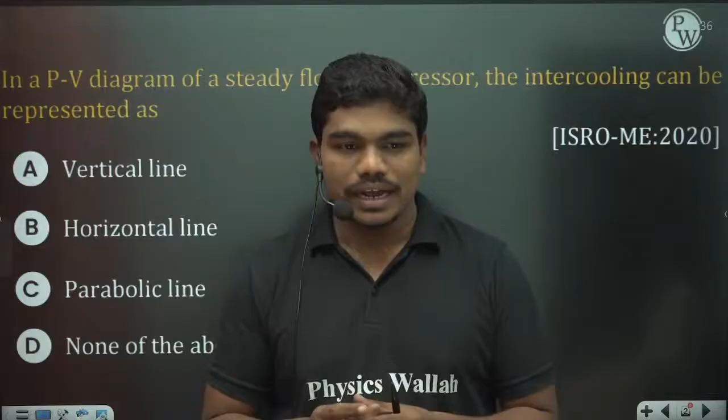Okay, JE 2025, please guide me, is there any scope in engineering? Yes, definitely in engineering you always have a lot of scope actually.

Okay, so let us start with this question. In a PV diagram of a steady flow compressor, the intercooling can be represented as what? So why do we do intercooling first? What is the necessity to do intercooling in any compressor? You know that normally if compressors run on some gas, PV equals RT, the normal ideal gas equation. So when we compress, the air temperature will increase, everyone knows this.

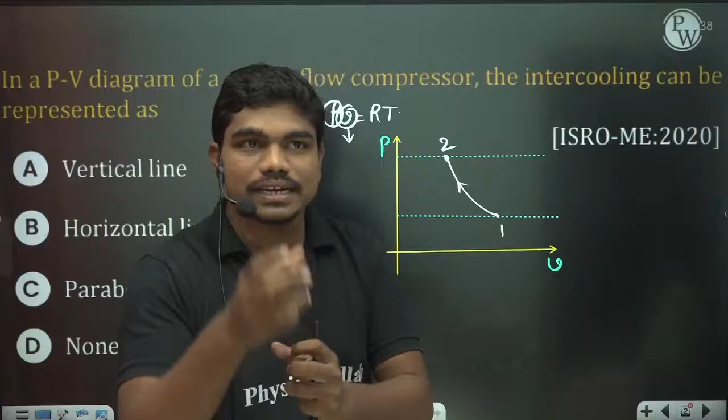So at that time what happens, if you do compression in a single stage - let's suppose this is compression 1 to 2, maybe some adiabatic compression on a PV diagram. When we compress, specific volume decreases and definitely pressure increases, right. So when V decreases and pressure increases, normally the ideal case of this compression is isothermal. But practically isothermal compression is very difficult because if you fit a cycle tube cylinder and start pumping air, immediately the cylinder gets hot, correct? So that's why practically increasing temperature will create complexity in compressing the air.

So that's why we generally take an intermediate pressure - so the system compresses in stages up to here, to 2', but here we control some temperature and then compress again like this. So this is 3' maybe. So this stage where you actually cool the gas - during this portion what you do is you actually take the heat from the system, from the gas actually. So this process in between, let's suppose this is A and this is B, this process A to B is called intercooling. So intercooling is always represented by this horizontal line on a PV diagram.

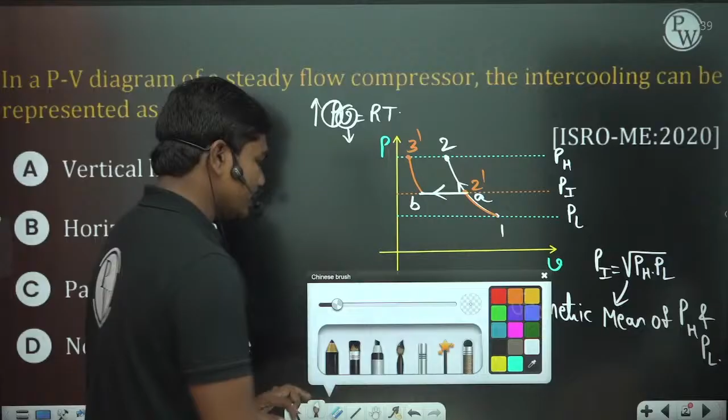Okay, so we have a lengthy derivation for this. But let us right now just keep this in mind, because this was a very short session on PYQ solving. So this line shows the intercooling curve. So A to B is intercooling, and because of this we will save this amount of load, or work, on the compressor.

Okay, so this is saving in work of compressor. Saving of work in compressor, and this intercooling A to B is a horizontal line in this PV plot. Okay, so if you have studied the Brayton cycle compression intercooling techniques, this question will be very easy to solve. So this AB is going to be intercooling.

In my life I have seen a compressor of 14 stages. When I worked at HPCL, there was a compressor with 14 stages of compression, 10 low pressure stages and 4 high pressure stages. And in 14 stage compression, for many gases we do intercooling in between. Okay, let us go to the next question quickly.

Which of the following uses a regenerator? So among these cycles, Brayton, Ericsson and Stirling, in how many cycles will we use a regenerator? So first, what is a regenerator? This regenerator is nothing but a device which absorbs heat during some part of the cycle, and rejects heat during other part.

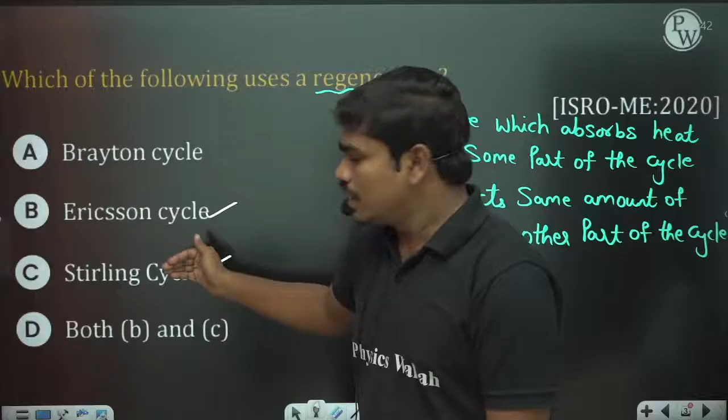So in both the Ericsson and Stirling cycles, heat addition and heat rejection are operated by the regenerator. So both B and C are correct, which is option D. Ericsson cycle and Stirling cycle both use a regenerator for the heat addition and heat rejection process. Okay, then let's go to the next question.

There was a bit of controversy in this question, now we will see what it is. A refrigerator with COP of 5 is used in a room of 300 Kelvin. So suppose a room had a temperature of 300 Kelvin. Now we have a refrigerator. What is the temperature inside? That is not given, but the coefficient of performance is equal to 5. So now we will solve.

See, COP is equal to Q dot L, the refrigeration effect you want, divided by the work input you are supplying. Now, the room temperature is 300 Kelvin, and we don't know the temperature inside the refrigerator. But COP is given. Now let us read the question.

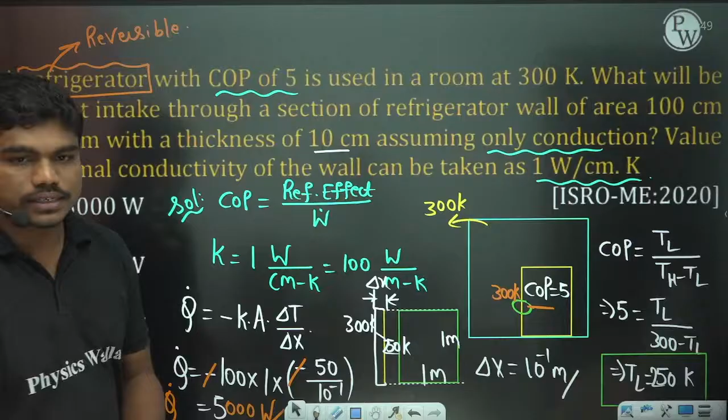Then Q dot value is equal to 250000 watts, actually 250 kilowatts तक value आएगा. Correct? Yes or no? 5000 is coming. Delta T is 250, right? What is this value? 5 times of 300, okay, this is 250, sorry. So if TL is 250, then temperature difference is 50. Then this value, so 5000 watts actually. So 5000 watts is the correct answer. Yes, TL 250 होना चाहिए, क्योंकि अगर इस equation को आपने solve किया तो TL का value 250 आएगा.

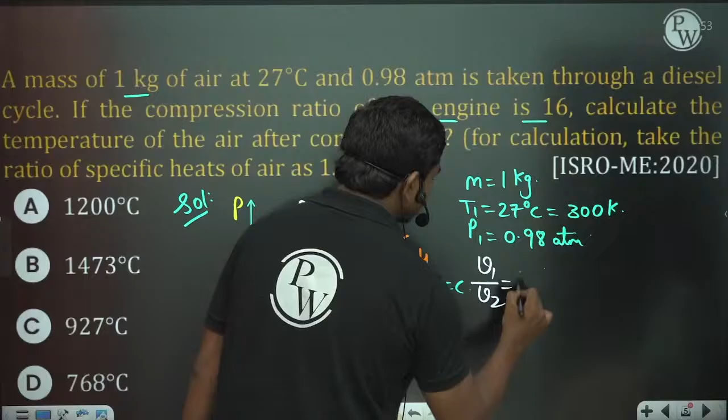If the compression ratio of the engine is 16, so what is the value of compression ratio? If this value is V1 and if this value is V2, then they have given that V1 by V2 is equal to 16, correct? So this is the compression ratio. Calculate the temperature of the air after the compression. That means when compression ends, we come to the second state, so what is the value of T2? So what is the temperature of this cycle at this state 2? This is what they are asking. So this 1 to 2 is adiabatic process, yes or no?

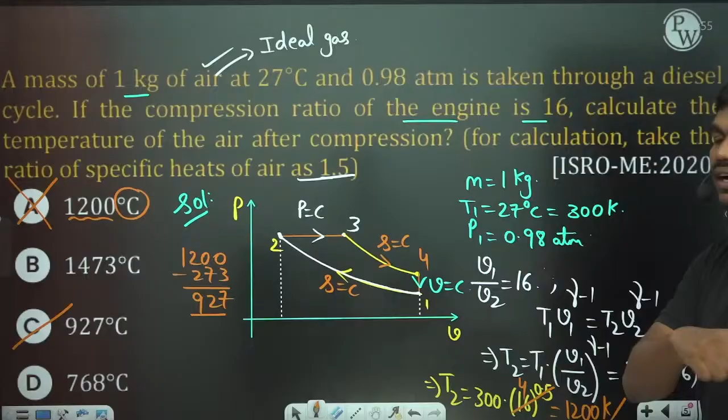हाउ मेनी ऑफ यू हैव थॉट दैट ए इज द आंसर? टेल मी हॉनेस्टली. हाउ मेनी ऑफ यू कैलकुलेशन करने के बाद इसको देख के यू फेल्ट दैट दिस इज द आंसर? Definitely there will be some people. Tell me honestly. क्योंकि लास्ट टाइम ये मिस्टेक किया बहुत सारे लोगों ने इस क्वेश्चन में. Okay? Yeah, you have to be a little careful. Fine.

So let us solve this question. An aircraft is in its takeoff roll at sea level. इस क्वेश्चन में भी ऐड कर दिया था लास्ट टाइम. I'll tell you why. See here. An aircraft is in its takeoff roll at sea level with ambient temperature of 18 degrees Celsius. So T infinity कितना दिया था? T infinity is equal to 18 degrees Celsius. What is the approximate speed of the aircraft if the temperature measured by a probe at the exit of the engine diffuser? Okay, so diffuser will be at the last part, correct?

So basically, an aircraft engine will be modeled something like this. In the beginning, you got some diffuser here. A probe is attached at the beginning of this diffuser. So let us suppose there is a probe at this engine. This is the engine, and this is the probe. So probe and this stagnation temperature कितना मेजर किया? 36 degrees Celsius.

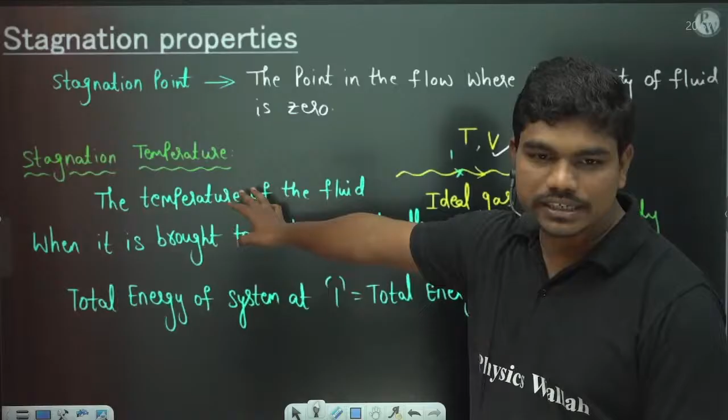Stagnation point is that point where the local velocity of the flow is 0. अगर आपका diffuser है ऐसे, when the airplane is moving, the air will also try to flow like this. At this point exactly, the velocity will be locally 0. इस point को हम बोलते हैं stagnation point. Practically, अगर एक ideal gas is flowing and it hits a body, the particle is brought to rest isentropically. The point where local velocity is 0 is called stagnation point.

After some analysis, you will find the relation by using the steady flow energy equation. Actually fluid mechanics class से notes का copy था. If you simplify this, you end up with this expression: stagnation temperature is equal to T1. T1 का मतलब stagnation point से बहुत दूर fluid flow का temperature. So T1 plus V square, velocity at which the particle is coming.

Normally in quiescent air, let us suppose air is stationary, and if the vehicle is moving, then you can approximate the same case as vehicle is stationary and air is moving in the opposite direction. Okay, so both are same. So V square is the velocity square of the vehicle, divided by 2 times Cp.

लेकिन एक चीज बहुत ध्यान रखना, this is in Kelvin and this is in meter square per second square. So this Cp should be substituted in joule per kg Kelvin. It should not be in kilojoule per kg Kelvin. This has to be substituted in joule per kg Kelvin here. Okay, now if you solve this question,

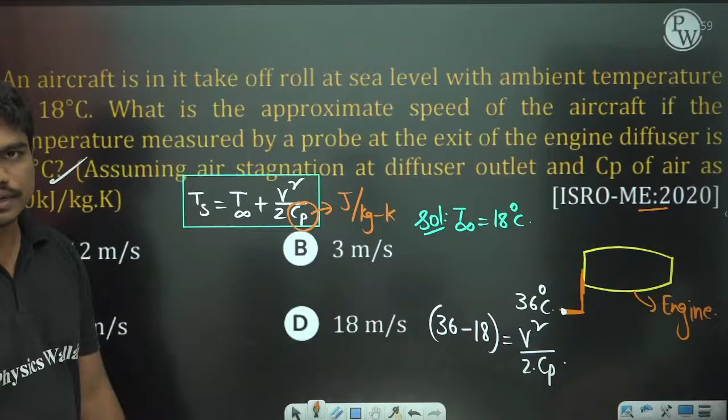Because everything is in normal SI units, you cannot put this in kilojoules per kg Kelvin. Clear? So now if you see this temperature difference, Ts minus T infinity, temperature difference in degree Celsius या Kelvin, दोनों units में same होते हैं. So 36 minus 18 is equal to V square by 2 Cp. So 18 into 2 into Cp.

So Cp का वैल्यू कितना दिया था? 1 kilojoule per kg Kelvin. So 1 kilojoule मतलब 10 cube. So 10 cube joule per kg Kelvin, and V square is 36 into 1000. So V is equal to square root of 36 into 10 cube. Square root of 36 is 6 and this is 60 into root 10. So 60 times root 10 meters per second, around 190 meters per second velocity.

But you can understand in these options which were given in this case, they did not convert this in joule per kg Kelvin. Because you can clearly see square root of 36 is 6 into square root of 10 cube. Square root of 10 cube is square root of 100 into 10. So 6 into 10 is 60, 60 into square root of 10 meters per second, around 189 to 200 meters per second.

If you see these values, these are 12, 3, 6, 18, and the answer was given as 6, but actually 6 is the wrong answer. Because if you want to get 6, you have to keep this 1 here. Yes or no? Then V square is equal to 36, V is equal to 6 meters per second आएगा. लेकिन keeping 1 here is wrong because this Cp has to be substituted in joule per kg Kelvin. Clear to all of you? Did you all understand what is the mistake in this question?

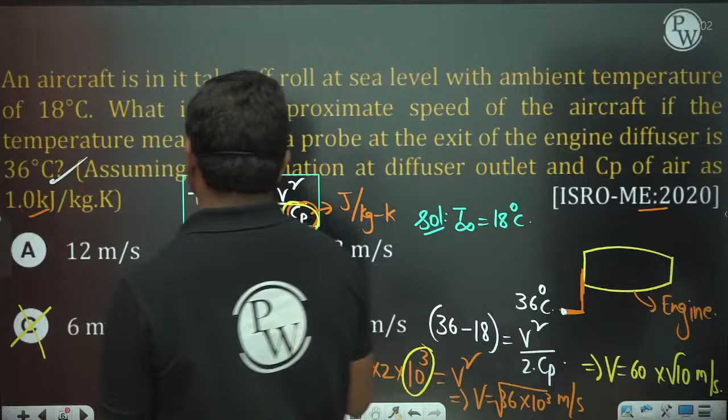So इसलिए एक चीज बहुत important है. इसलिए मैंने थोड़ा PDF का notes भी दिया आपको. You can see this is the stagnation properties where we discuss a bit, and normally this is temperature, so इसको भी temperature का dimension होना चाहिए, correct? So this term is called dynamic temperature. अगर किसी ने पूछा एग्जाम में इस condition का dynamic temperature क्या होता है? V square by 2Cp is actually equal to the dynamic temperature. हम इसको dynamic temperature क्यों बोलते हैं?

Because this is due to the velocity, and if you looked at this equation, all the quantities must have the same dimension. So both these have dimension of temperature, and as per dimensional analysis, this dimension should also be temperature. That's why we'll treat this as dimension temperature, and you can see the values of gamma for different gases that I mentioned earlier.

So once stagnation temperature is known, stagnation pressure also needs to be calculated, because P1 into T1 by Ts. My speed of talking is very high, I'll slow it down a bit. So P1 into Ts by T1, whole power gamma by gamma minus 1.

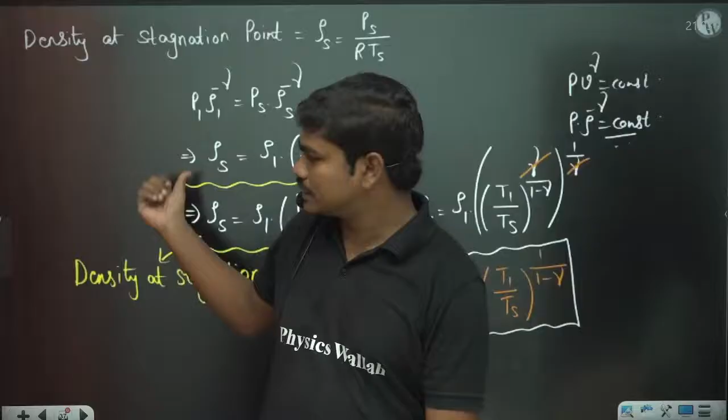Next, go to the next question. The compression ratio for diesel engines is close to.

Now you know that generally it is around 16 or 18 within that range. For Otto engines or SI engines, generally petrol engines, this will be within the range of 8 to 12. Below 8 it is difficult because you all know this equation, right?

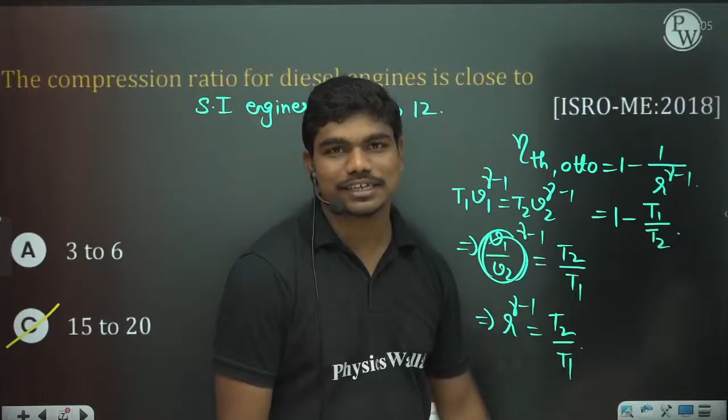Normally, if R increases - let us suppose compression ratio is increasing - what happens to efficiency, will it increase or decrease? Type in the chat box. If you increase the compression ratio, what happens to thermal efficiency? Will it increase? Or will it decrease? Type in the chat box. It will increase, correct? It increases. Everyone type in the chat box.

This value will increase, but practically there was a limit to this. Why? Because our value is generally 8 to 12, we generally don't go beyond 12. Because when an engine's compression ratio exceeds 12, the pressure building in the air becomes large such that when the air-fuel mixture gets compressed, some auto-ignition happens in between, which creates knocking. That's why, to avoid this knocking, we restrict the compression ratio.

But in diesel engines, diesel has a higher auto-ignition temperature, so normally the range is 16 to 22. This is the range that we practically use in general cases.

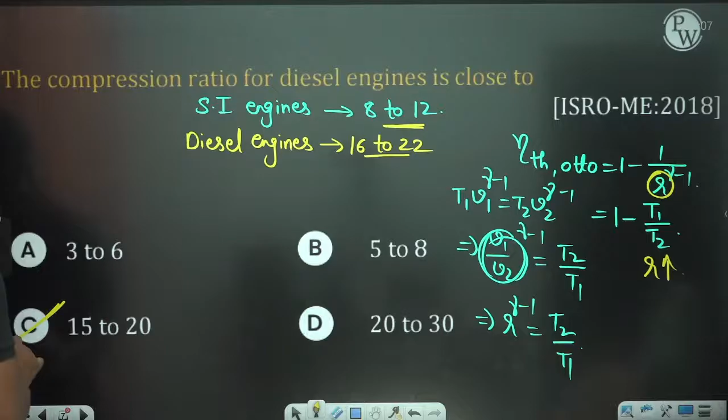So that's why among the options, 15 to 20 is the range very close to diesel engines. Normally diesel engines operate at 16, 18 or within that range actually. So within that range we operate the diesel cycles.

Clear? Now let us solve this question. 1 kg of carbon monoxide requires how much quantity of oxygen to produce 11 by 7 kg of carbon dioxide gas?

First, tell me, what is the equation of carbon monoxide plus oxygen gives carbon dioxide? Okay, they ignite by combustion, yes, in the previous case.

So 1 kg of carbon monoxide, some carbon monoxide we have, and also O2 gives CO2. Now we want 1 kg of carbon monoxide. So carbon monoxide ka weight kitna diya? 1 kg. Requires how much quantity of oxygen? Kitna gas oxygen chahiye ki CO2 kitna produce karna hai? 11 by 7 kgs.

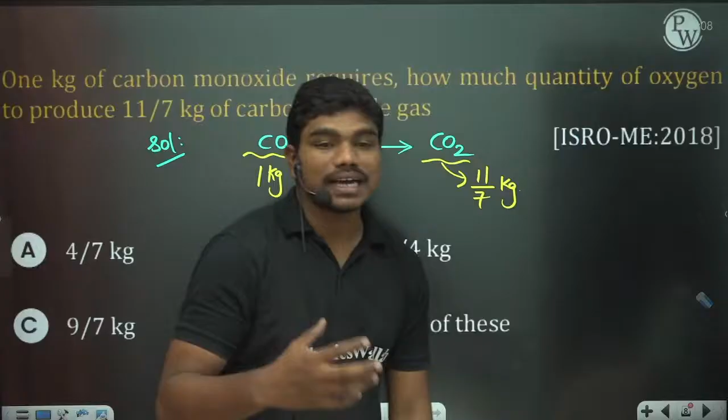Okay, so 2CO plus O2 gives rise to 2CO2 actually. Lekin mujhe bhi maan lo ki is equation nahi pata chala mujhe. Then everywhere you see there should be mass balance. Yes or no? Mass balance is the common thing that should happen. Agar aapke paas kuch reactants hai to ek chemical reaction hua and aapko kuch products bhi mila.

Now tell me one thing. Reactants ka mass mR, products ka mass mP. Ye dono equal hona chahiye ya nahi? Mass should be conserved, correct? Reactants mein kitna mass hai utna products bhi aana chahiye, nahi to we are not obeying mass conservation, correct? So that's why total mass of the reactants is always equal to total mass of the products. No need to balance the chemical reaction, nothing.

Okay, just write this. So now if you see 1 kg of carbon monoxide is there, products is coming 11 by 7 kgs. So oxygen ka weight kitna hona chahiye? Mass of oxygen is equal to 11 by 7 minus 1 which is 4 by 7 kgs. Option A bas. Okay, sirf simple mass conservation se iska value calculate karna hai.

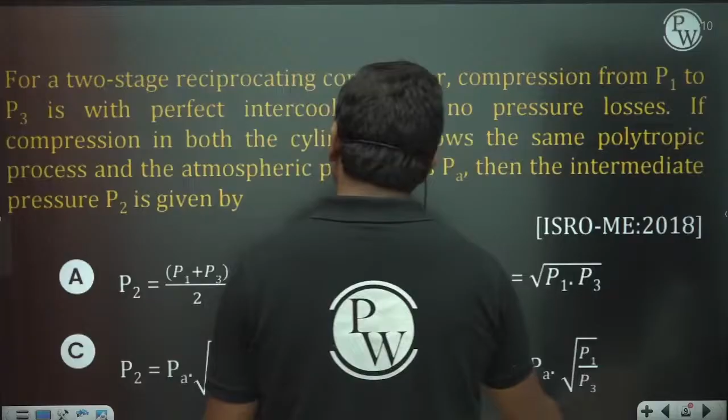Okay. Now, let us go for the next question. For a two-stage reciprocating compressor, compression from P1 to P3 is with perfect intercooling and no pressure loss. If compression in both the cylinders follows the same polytropic process and the atmospheric pressure is PA, then the intermediate pressure P2 is given by.

So, as I was telling you, for perfect intercooling, kuch mathematical derivation karna hai, actually kuch differentiations hai. For perfect intercooling, this intermediate pressure should be equal to geometric mean of the low pressure and high pressures. Okay, so this is like geometric mean. PI is geometric mean, geometric mean actually here. So we are doing the compression in two stages.

PL se PI tak ek compression karte hain and PI se PH tak doosra compression karte hain. Okay, lekin PI ka value kitna milega? PI equals square root of PH into PL actually here. Okay, and many times if you go for three-stage compression, okay, so you have to set this PL, P1, P2, PH in geometric progression. Matlab if this is A, if this is AR, then AR square, AR cube. This will be the optimum.

You can do the derivation actually. I had it but I felt it will be very mathematical right now, so that's why I have given you this. So whenever you have intercooling, the intermediate pressures should be set such that they are in the geometric mean of the initial and final values. That's why option B is the correct answer.

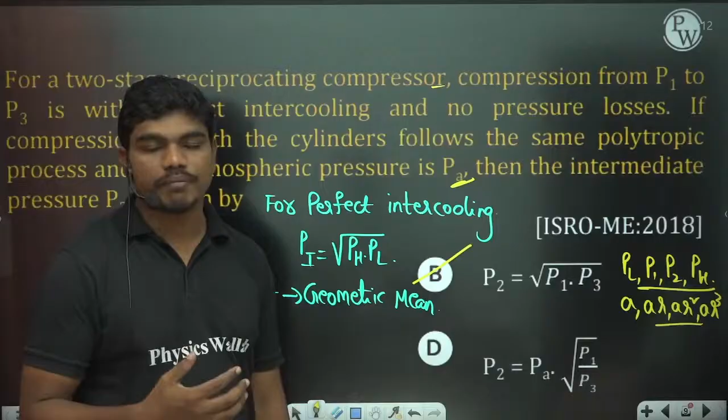P2 is equal to square root of P1 multiplied with P3. If you have 3 stage intercooling, then definitely all these stages will be set in intercooling in the geometric ratio. So this will be in geometric progression.

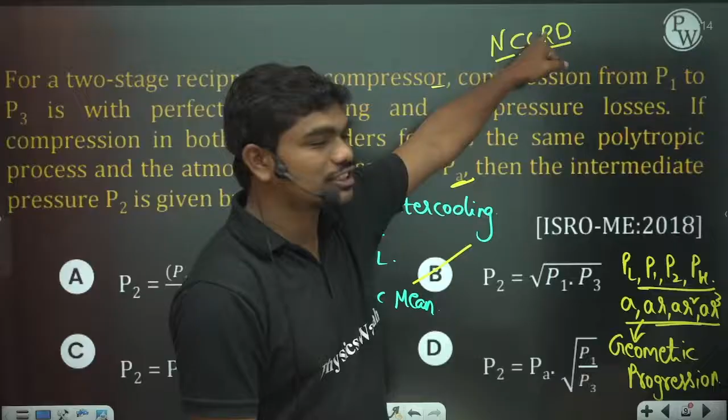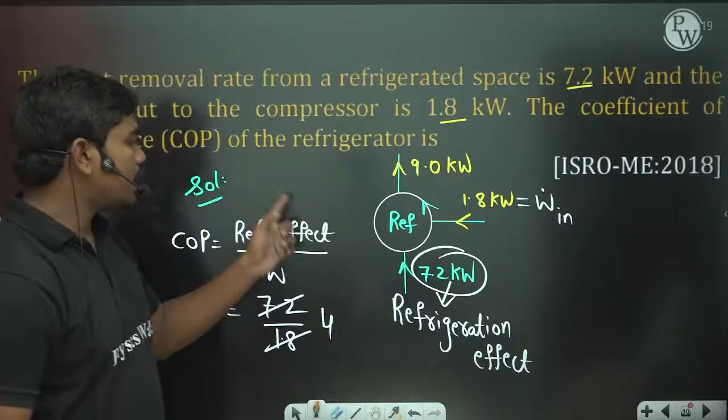Clear? Very simple question. Look, guys, every device के लिए the formula of efficiency या COP is common. बहुत सारे लोगों को ये confusion होता है कि किस चीज को numerator में लिखना है, किस चीज को denominator में. Efficiency or coefficient of performance, what you are expecting from the machine, that's called desired effect. रेफ्रिजरेटर से हम क्या एक्सपेक्ट करते हैं?

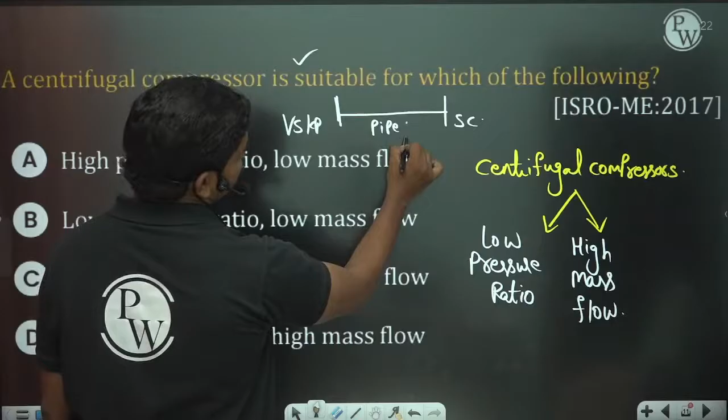Normally ये होता है कि I'll tell you some small story of HPCL. Okay, what happened? Normally let us suppose ये विशाखापट्टनम and मान लो कि ये सिकंदराबाद. There is a pipeline directly underground from Visakhapatnam to Secunderabad actually. Normally it is called VSSPL, Visakhapatnam Secunderabad underground pipeline. So in pipeline क्या होता है? Let us suppose if petrol or diesel is flowing in, then because of the friction loss, the pressure of the fluid will drop actually.

हम सबको पता है कि HL is equal to FLV square by 2GD, V average square by 2GD, ये पता है हमको. So for every some distance, the pressure of the fluid will drop. Okay, the pressure will fall because of the friction. Now, if you want to send the fluid till here effectively, you have to maintain that pressure, correct?

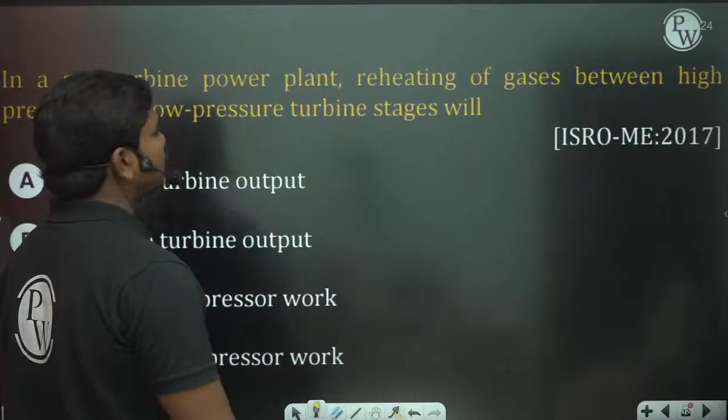In a gas turbine power plant, reheating of the gas between high pressure and low pressure turbine stages will improve turbine output, decrease turbine output, increase compressor work, decrease compressor work. So मान लो कि हमारे पास एक TS डायग्राम है.

ब्रेटन साइकिल का, so TS. Okay, so pressure limits, these are the final pressure limits, but also there is an intermediate pressure limit. Okay, now if you are reheating the substance, reheating का हम कैसे करते हैं? पहले isentropic compression करते हैं, 1 to 2, and उसके बाद constant pressure heat addition करेंगे, correct? So constant pressure heat addition and उसके बाद हम expand करेंगे to some intermediate pressure. So यहाँ से फिर हम इस temperature को reheating करेंगे, yes or no?

So this reheating, normally in case of ideal reheating, we will reach again the same temperature and then we will expand to this low pressure, which is the heat rejection. Normally atmosphere will eject in case of gas turbines and all. And finally, we will have this heat ejection process. Okay, so this is heat addition, this is also heat addition. And this is the work done in high pressure turbine. So let us suppose if this is 3 to 4 and this is 5 to 6 for example.

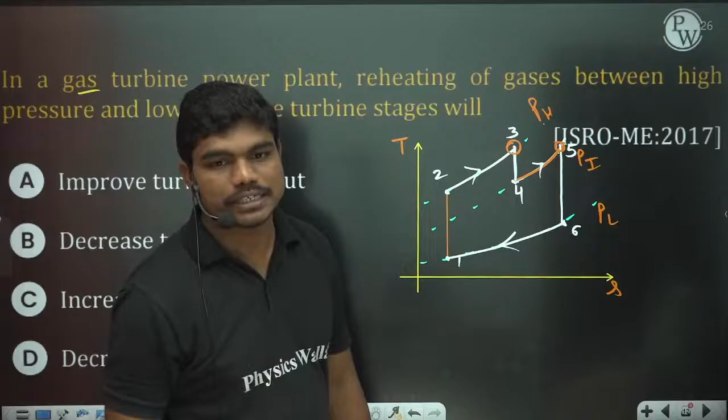So this turbine is operating, means basically how we decide high pressure turbines and low pressure turbines. Okay, so based on the inlet to the turbine actually. Okay, so point at 3 is at high pressure as compared to point at 5. ऐसा हो क्योंकि अगर आपने नीचे से ऊपर गया तो this is PH, PL and this is PI. Okay, so this is PH, PI and PL. Now if you see this turbine has the inlet at low pressure comparatively. So that's why this expansion or this turbine is basically called the low pressure turbine, LPT बोलते हैं, and इसको बोलता है कि HPT, high pressure turbine.

Okay, so now if you see this case, reheating की वजह से compressor में कुछ effect है या नहीं? Is there any effect on this compressor because of this reheating? Actually, reheating की वजह से compressor की load में कुछ change है क्या? No, correct? So there is no change in the efficiency or basically operating conditions of the compressor actually. So no effect on compressor. लेकिन work output of the turbine क्या हो जाएगा? It will be increased, correct? So work done by the turbine will increase.

Turbine का work output increase हो जाएगा. क्यों? Because you can see high pressure turbine में कुछ work मिलेगा आपको and also in the low pressure turbine. Okay, so that's why total work output from the plant will increase, लेकिन compressor में कुछ effect नहीं होगा. ठीक है? So you are improving turbine output actually here, because there is one heat addition, one expansion and also there is second expansion. But of course, compared to this expansion, sometimes this expansion will be less, but that also depends upon the pressure ratio again, because these expansion stages will be large as compared to these expansion stages. Clear?

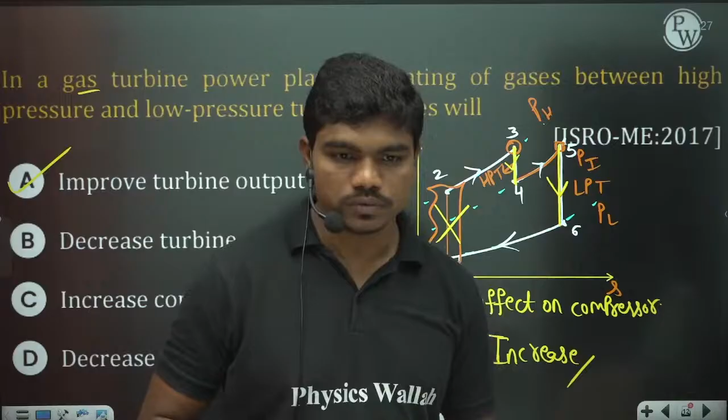Sound problem? Ronik, कुछ आवाज का issue है क्या? I think it's fine, right? Please type in the chat box. Any sound issue? It is good, sir. Okay. Ronik, I think आपके सिस्टम में कुछ issue था. एक बार थोड़ा refresh कीजिए, ठीक है? क्योंकि सारे लोगों का किसी को problem नहीं है. So please continue.

Fine. So let us see this. The air inside a space capsule is maintained at the required condition by passing it through a set of heat exchangers. So basically क्या होता है? हमारे पास कुछ heat exchangers हैं, and we are actually sending in some air, and it is coming out. This is in and this is out. Normally we denote these heat exchangers something like this. The heat exchangers are designed such that the humid air, what is the meaning of humid air? Normally water vapor will be there, passes through them, is cooled and partial condensation of the water vapor occurs.

These terms are very important. Look, this humid air is passing through the heat exchanger coils. It is cooled. So पहले air का temperature नीचे आएगा and partial condensation of the water vapor occurs. So मान लो कि आपके पास कुछ air है and उससे हम water condense कर रहे हैं. Then what happens to the water content in the air? There is water in air. If you want proof, take a cold bottle out of the fridge and leave it in the room, then you can see small water particles will land on the surface of the water bottle.

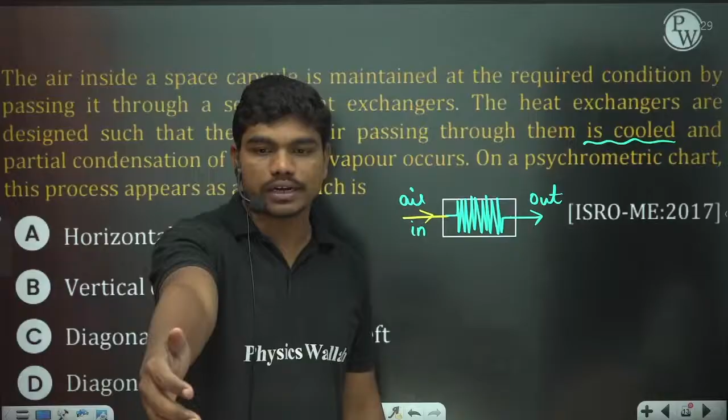From where is this water coming? From the surrounding air actually. Okay, so practically, in air you will have water in a superheated state. Okay, when you take this cool atmosphere, like a cool bottle for example, मान लो कि आपके पास एक cooling bottle था, so if you clean this bottle completely, it is filled with cooling water, and if you keep it in a room like this, then after some time you will find there are lots of water droplets on it, correct? So where is this water coming from actually? Because atmospheric air में कुछ पानी है, and that water is actually present in the saturated vapor, superheated vapor state.

Okay, and when you cool this bottle, then definitely what happens? At some particular point, the temperature of the air falls below the dew point temperature, and they start forming these dew drops or water particles on the top of the bottle. Okay, so that's why in that case it's called dehumidification generally, because you take out the water. Now let us see on a psychrometric chart. This process appears as a line which is horizontal to the left, vertically downwards, diagonally downwards to the left, or diagonally upwards to the right. So first of all, if you see the psychrometric chart,

the psychrometric chart will be something like this, correct? So this is omega, which is specific humidity, and here you have the dry bulb temperature in degrees Celsius, correct? And now you have these relative humidity lines, something like this, and this is the 100% saturated case. Okay, now try to understand this. Forget about these relative humidity lines as of now. So this is omega, which denotes mass of vapor by total mass in a given sample of moist air. So they are telling you moist air is passing through the heat exchanger.

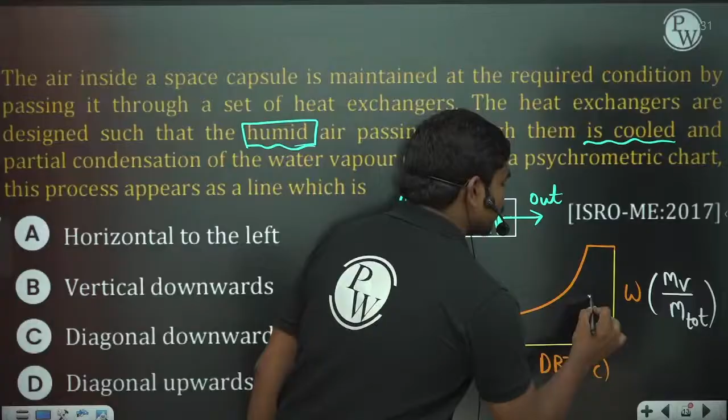Now by the time it is coming out, air is getting cooled. First of all, when air is getting cooled, should the dry bulb temperature decrease or increase? Let us suppose this is the initial state of the air; it has some amount of water vapor and it is also at some temperature. Now tell me one thing, this point is here. Whenever you are cooling the air, should the temperature come down or increase? Type in the chat box. It should decrease, correct? So the temperature should decrease.

And also partial condensation of water vapor occurs. So what is the meaning of partial condensation? From the air which is available, you are taking out some water, correct? So what's happening to the water content in the air? That also decreases, because you are doing condensation, and जो air में पानी होते हैं, उस पानी को हम निकालते हैं partial condensation से. So therefore this omega value should also decrease. मतलब the finishing point should be below this horizontal line, and also to the left. So it should be somewhere here, and they told it is a straight line, so the straight line should be something like this. This is state 1, this is state 2, and this is the line.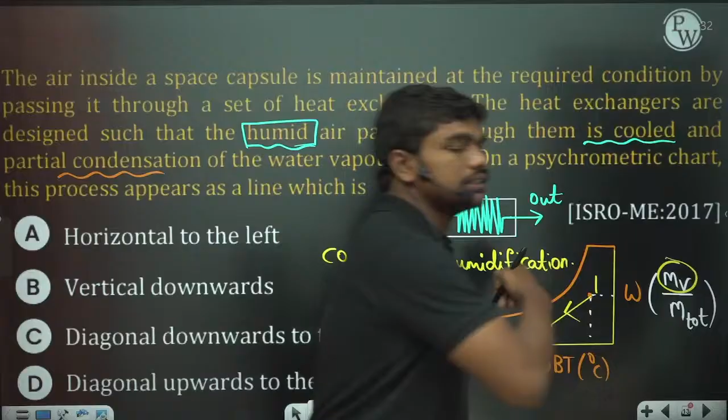क्योंकि इसको cooling and dehumidification बोलते हैं. Dehumidification क्यों? क्योंकि we are condensing the water vapor. अगर आपने कुछ condensation किया तो this mass of vapor inside the total air will decrease. Okay, so that's why cooling and dehumidification is an arrow towards the left, and of course towards the bottom. So diagonally downwards to the left. Option C is the correct answer in this case.

Clear to everyone? Please type in the chat box, yes or no. Is this clear to every one of you? This is basically dehumidification. So how can we say it would be a straight line? Because in the question it is given. That's it. Okay.

Is this clear to all of you? Did you understand why it's a straight line? Because it is directly given in the question. And normally in this case, if you look at these things like specific volume, basically it can be any process, but normally we denote this cooling and dehumidification with these lines.

Okay, that depends upon the substance which we are cooling, the type of the gas we are cooling and all. Because it is clearly given in the question as a line, that's why all these four options are lines. So that's why this is a diagonal towards the left bottom.

Okay, so now I thought of giving you one very important thing again: acoustic velocity. So what is this acoustic velocity? When you are dealing with the ISRO exam, especially with compressible flows, this question comes many times in the exam. So let us see what is the acoustic velocity. I have just given you some idea. This is also one clipping from my class notes.

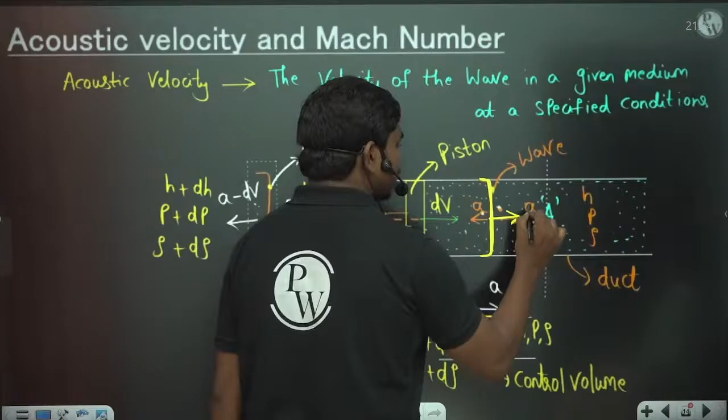Basically, acoustic velocity is: if you create a disturbance in the medium, then the disturbance will move with some velocity. So here you see this disturbance is this wave front I have created. This is the disturbance which is traveling at some acoustic velocity A, and this velocity of the disturbance in a medium is called acoustic velocity.

So we will have a lot of examples and understandings at this point. I have to talk about the wave front. Normally this is called the wave front. Then I'll take this as a control volume. Then we will do some steady flow energy equation analysis, some bit of explanations and all.

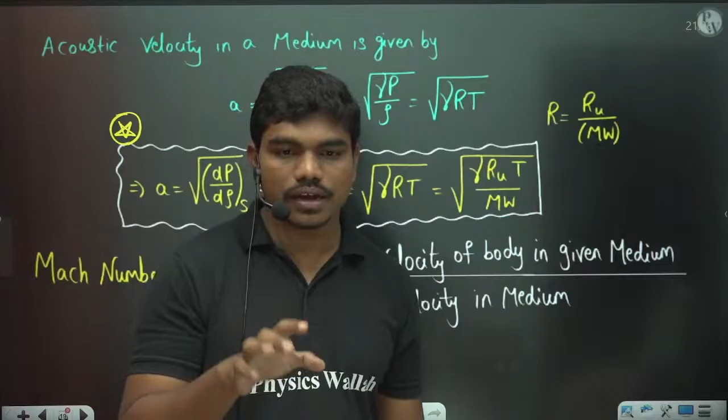Okay, so please go through this understanding once. It will be easily understandable. I have given very simple definitions here and there, and every simple calculation I have done in each step. So everything will be in detail. Please go through this PDF once, and this will be only some 5 slides: 1, 2, 3, 4, 5. So you can easily understand how this expression is coming.

Even if you don't look at this, please make sure of one thing: A is equal to root gamma RT whenever it is passing through some ideal gas, and this is also root gamma P by ρ, or the adiabatic dP by dρ value.

Okay, bulk modulus. So we see a lot of things, and Mach number is basically actual velocity of the body in a given medium by acoustic velocity. Okay, so this is one very important understanding here.

So finally this acoustic velocity derivation and Mach number, you will get this PDF. So from this PDF you can see these 4 or 5 slides once. Right now we are just solving some questions on this. So let us go forward here.

Okay, so this is some content. Again, I thought of putting it here because there will be at least one question based on this complete story of acoustic velocity or Mach number every year in the ISRO exam.

Okay, a house refrigerator with its door open is switched on in a closed room. The air in the room is dash. This is one of the very standard questions that we discussed during the first law of thermodynamics.

Okay, so suppose you have a room, and also there is a refrigerator inside. There is a refrigerator at this corner of the room, for example. Let us suppose there are heater coils here, condenser coils, for example here. Normally if you see the back side of the fridge, you will have some coils like this, those are the condenser coils. Now, a house refrigerator with its door open is switched on in a closed room actually here.

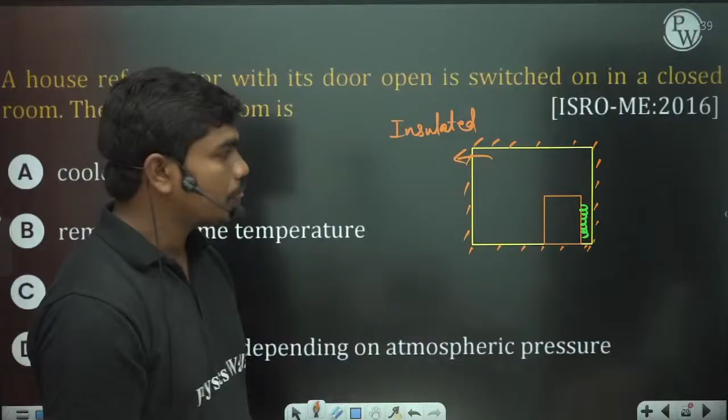Okay, so that's right. Now whenever you see, if you apply, there will be some electric supply coming to this refrigerator, yes or no? So there is some energy input, and practically when this is insulated, nothing is going out, so E in minus E out will be equal to delta E of the system.

And here you can see nothing is going out, definitely delta E of the system means even though this refrigerator is doing its work cooling, the condenser coils will add heat into the room. Because of which the room temperature gets heated.

Never feel that in a closed room if you open the refrigerator and go out, by the time you come back the room will get cooled, okay? Don't do this, because the room will actually get heated up.

If the room doesn't have proper ventilation, if this heat cannot get transferred outside, the room air temperature will increase. And also don't make this mistake, like many people feel that if you put on the fan and go out, the room will again come down. No, even in that case you will feel very hotness in the room after you come back.

The reason is the same thing: energy will be coming in terms of electrical energy, but no energy will be going out. So definitely the energy of the system which is inside, normally the atmospheric air, will increase. So that's why this is very dangerous. So don't do these kinds of things expecting some cooling to happen — actually heating happens instead of cooling.

Then you have to pay the power bill and also have some discomfort, okay? So that's why normally the temperature will rise and the air in the room will get heated because of this understanding. Delta E is positive in this case, because this value is positive and this value is also positive, definitely, okay?

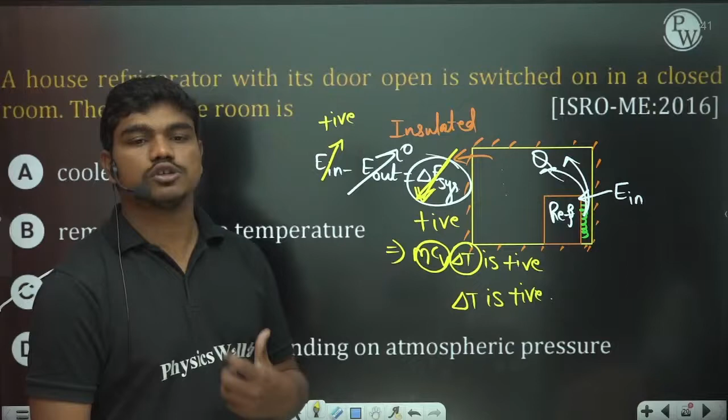So this is one common misunderstanding in many students, and that's the reason why this is one of the famous interview questions. People feel that whatever heat is in the room will be sent into the refrigerator and the room gets cooled, but actually these condenser coils will again eject that heat into the room, and finally after some time the room gets heated up. Is this clear to all of you?

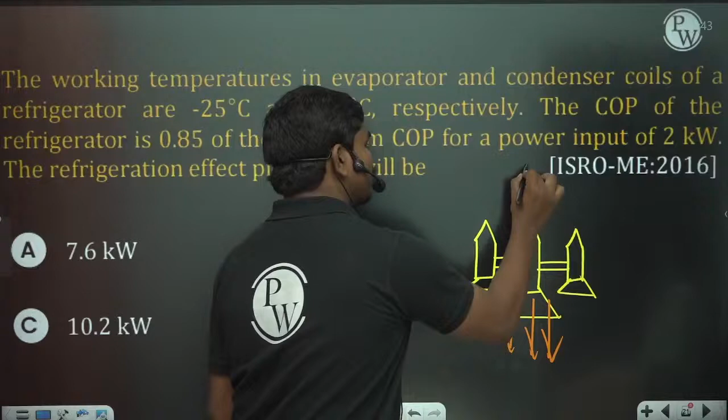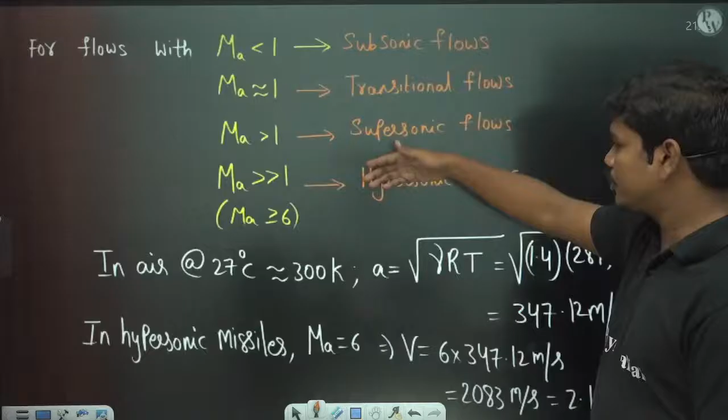Okay, and normally at normal conditions, whenever the air is at 27 degrees Celsius, at that time the acoustic velocity is around 347 meters. So square root of gamma RT, for gamma of air 1.4, characteristic gas constant 287 joules per kg Kelvin, temperature 300, this will be around 347.12. So if you take a hypersonic missile with Mach value equal to 6, that's 2.1 kilometers per second.

So what does that mean? If dA is positive, dV will be negative, correct? Because this ratio dA by dV has to be negative. So that's why if dA is positive, dV should be negative. That means, or if dV is positive, dA should be negative. dV is positive means if you have a cross section V1 and V2, if V2 has to be more than V1, if the difference final minus initial has to be positive, that means if V2 is more than V1, if the fluid has to be accelerating, this dA should be negative, meaning final cross section should be less than the initial cross section. So the passages should be converging in that case.

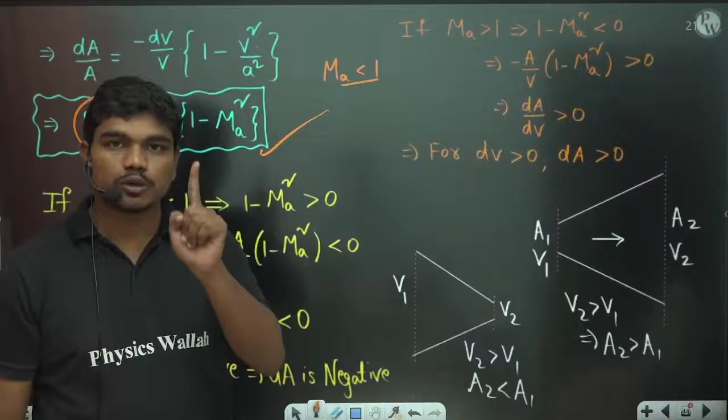So for Mach numbers less than 1, this passage has to be converging like this, and for Mach number more than 1, this should be diverging, like in the practical case. So therefore the rocket, initially when it starts its motion, will very soon reach its Mach scale. So whenever it reaches Mach equal to 1, then immediately for further thrust you have to have diverging nozzles.

So immediately, generally if you see these nozzles, I'll show you rocket nozzles. You can see, I'll show you some bit here.

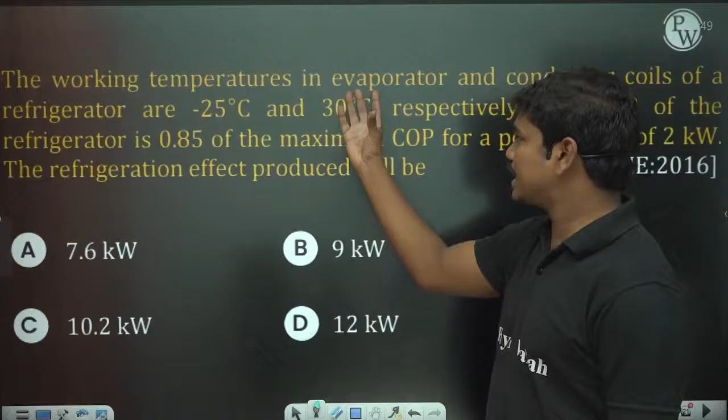So let us solve this question. The working temperatures in evaporator and condenser coils of a refrigerator are minus 25 degrees Celsius and 30 degrees Celsius respectively. So basically this is the heat addition temperature to the refrigeration cycle and this is the heat rejection temperature. The COP of the refrigerator is 0.85 of the maximum COP for a power input of 2 kilowatts. The refrigeration effect produced will be dash.

Okay, so they have given you some options again. So let us do this.

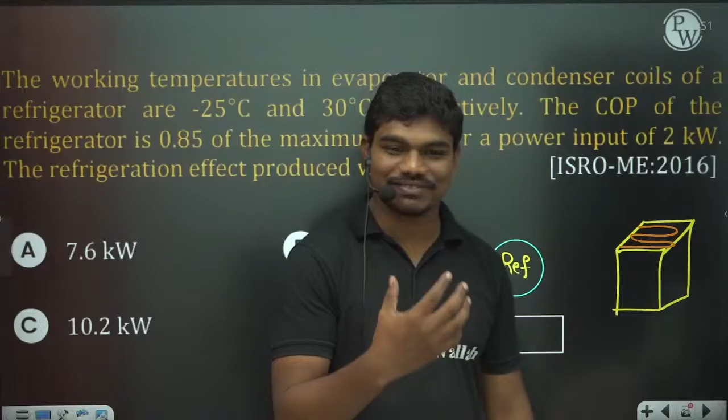These evaporator coils will pick the heat from the refrigerator space. That's why the top will generally be the freezer location. Because of buoyancy hot air will flow up, so cooling becomes very easy. This is also an interview question: why is there a freezer at the top in most refrigerators? The reason is this is most cost effective and also performance effective.

When you keep some hot bodies inside, let us suppose some food or some milk, these will release some heat into the air inside the refrigerator. By buoyancy, hot air has less density compared to the cold air. So when this air gets heated up, it will try to move up. That's why these coils will always be on the top, so that heat picking becomes easy for the refrigerant gas. That's why we want a refrigerator like this.

So anyway, let us see these evaporator coils at minus 25 degrees Celsius. What is the meaning of minus 25 degrees Celsius? 273 minus 25 gives you 248 Kelvin. And what about the heat rejection temperature? This is 30 degrees, so 303 Kelvin. Now there is some QL, QH, and some work input to the compressor: Q dot H, Q dot L, and W dot input to the compressor.

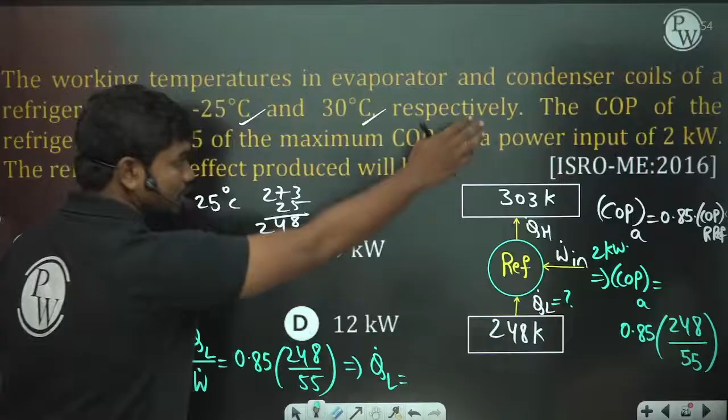Now if you simplify this, Q dot L is equal to work input to the compressor, 2 kilowatt, so 2 into 0.85, let us suppose 85 by 100, into 248 by 55. So this is 55. Now if you simplify this, 11, and this is around 13 I guess? 5 13s are 65, so 17. 5 17s are 85. And you have this 11.

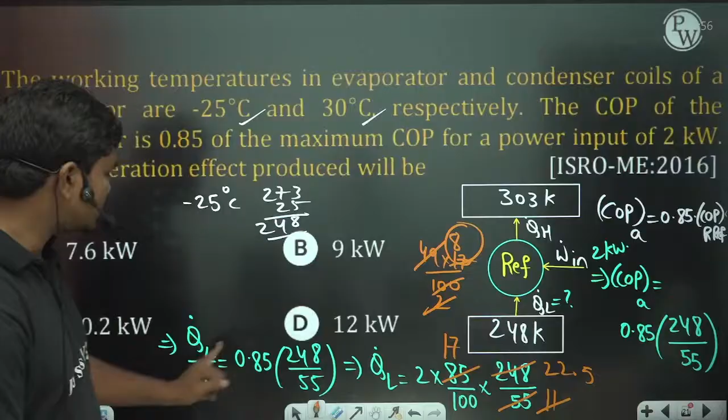So 7.6 kilowatts is the calculation that you get here. 2 into 17 into this is around 22.5, something around that. If you multiply the calculations, that comes to something less than 8. If you see the options, there is only one option less than 8. So 7.6 kilowatts is the correct answer. You don't have to do the actual division; just compare the values and look at the options.

And here there was a big gap between the options. This is less than 8. All these options are more than 8. If you cancel this 11, it comes to 22.5. So 2 into 22.5 is around 45 by 100. So the value should definitely be less than 8.5. There is only one option. That's how you can decide it is 7.6.

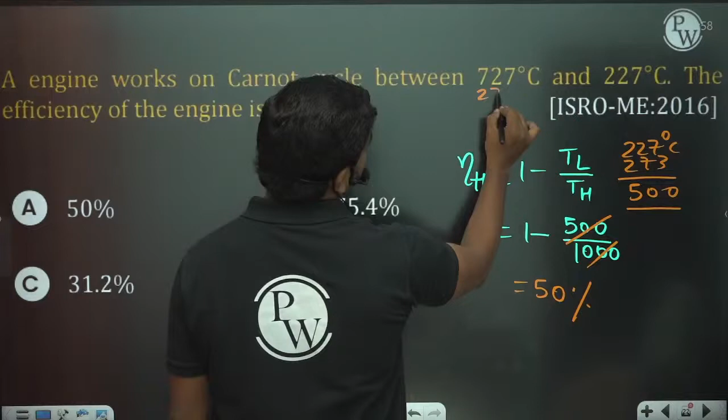227 degrees Celsius plus 273 is 500. Similarly, adding 273 to this gives 1000 Kelvin. So heat rejection is at 500 Kelvin, heat addition is at 1000 Kelvin. It is a Carnot engine, so efficiency is equal to 1 minus TL by TH, 1 minus 500 by 1000, so 50%. Option A is the correct answer.

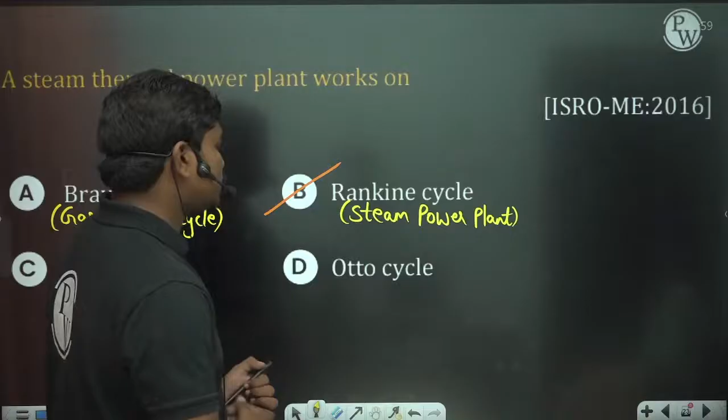Normally on Carnot cycle, ideally no device actually operates in reality, of course, but under certain special considerations, like for example, if you increase the stages of compression and expansion to a very large number of compressions and expansions in Brayton cycle, that gets converted to Carnot cycle. But the work output drastically reduces, so that's why we do not do the Carnot efficiency. In Otto cycle, all the SI engines generally, spark ignition engines, actually operate on this.

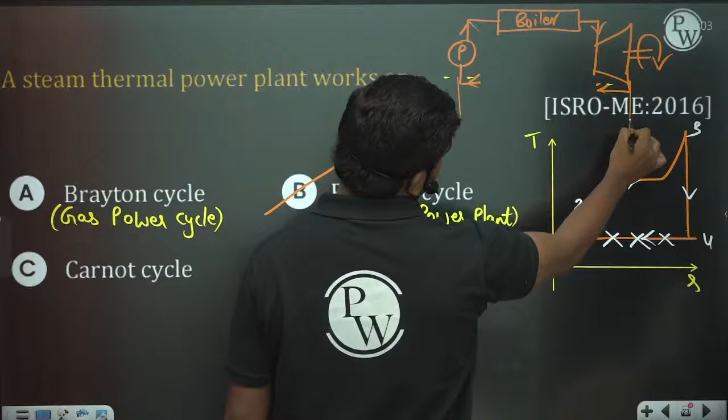So let us suppose you are taking water directly from that lake. It's a very large lake. Okay, whatever the water you take, whatever the heat you put, the properties of this water do not change. Okay, there's a large lake available. It's a fresh water lake. Normally when we take this water, many of you may say that because of some impurities, salts and all, some scaling on pumps, boiler will get damaged and all.

But let us suppose it's a very large fresh water lake. If you have this large fresh water lake, you can take water directly to pump from this reservoir, and also you can eject the turbine output. Then no need of condenser actually. Then you can save the cost of this condenser actually.

Okay, then why can you not run a plant like this? Or first of all tell me, can you run a plant like this, without having the condenser? A Rankine cycle, basically, taking water from the fresh water lake and rejecting it to the same location. This can actually solve your purpose because टर्बाइन रन करने के लिए कुछ स्टीम होना चाहिए एंड स्टीम मैन्युफैक्चरिंग करने के लिए पंप है बस.

Now tell me, is this condenser mandatory in a Rankine cycle actually?

So please take some sessions on interview like this. We'll discuss. Okay, पहले हम एग्जाम क्लियर करते हैं, उसके बाद इंटरव्यू के सेशंस लेते हैं, ठीक है?

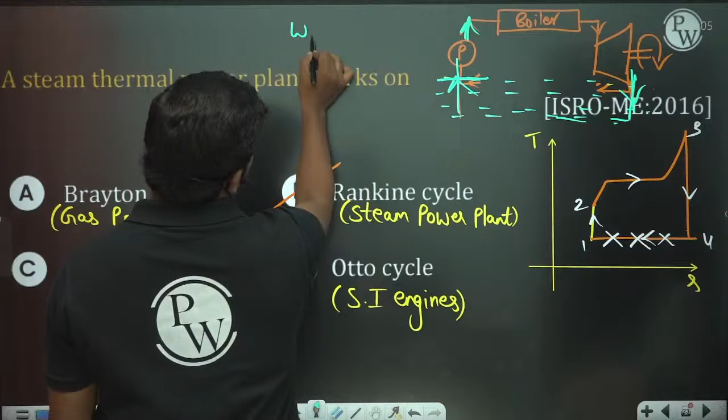But tell me one thing, without this condenser can this Rankine cycle operate? More heat would be required every time. No. Why? Because you see, the pump is pressurizing almost the same water and pump work will be very small, क्योंकि हम सारे लोगों को पता है कि control volume work is equal to minus integral VdP, from inlet pressure to outlet pressure. Because pumps generally handle liquids, liquid density will be large; density of water is around 1000, so specific volume will be 0.001.

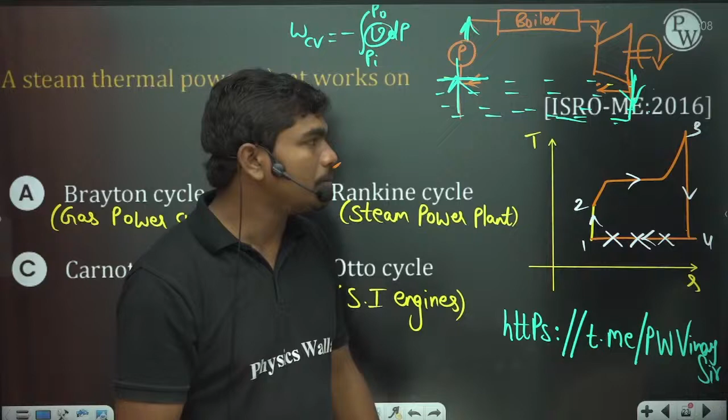And now if you see, guys, look at one thing very importantly. Normally in Rankine cycles, if you send the expanded steam to the pump, it won't work because it will violate the Kelvin-Planck statement. We are not sending expanded steam now. This is a large reservoir, so even if you are releasing some steam at very low pressure, if you leave the turbine exit to the atmosphere, the exit pressure will be the atmospheric pressure. So when it's a large lake, this steam will get condensed again because heat will flow from steam to the water, and finally everything will be the same.

Suppose you take the input to the pump from some different location, you will get water directly. But the main drawback in this case is, yes, you can operate the plant under these conditions, but your efficiency will fall drastically. The reason is, whenever you operate a condenser, the condenser pressure will be much lower than atmospheric pressure.

So if you use this condition, you are expanding the steam in the turbine from boiler pressure to atmospheric pressure. But with a condenser you are expanding the steam from boiler pressure to some pressure below atmospheric pressure. So without it, your work output of the turbine will decrease. That work output should not decrease, because pump work is very less. In the boiler you're adding the same amount of heat, but your work will fall down.

So practically, even though there is a facility to run a plant like this, without having a condenser the plant efficiency will fall down very easily. Plant efficiency has to be maintained, that's why this condenser is kept in the plant. I can also show you mathematically. Thermal efficiency is equal to 1 minus TL by TH. Heat rejection is at constant temperature, but heat addition is not at constant temperature. That's why we use something called mean temperature of heat addition.

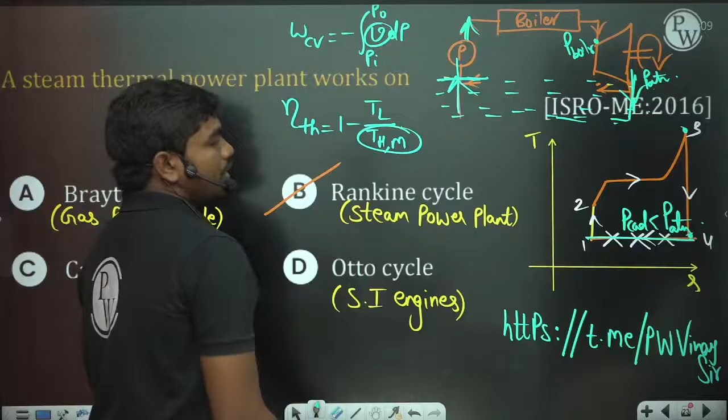Whenever you are rejecting to the atmosphere, heat rejection is at ambient temperature, but at 40 kilopascals or a pressure much below atmospheric pressure, the saturation temperature will be low, so the heat rejection temperature will be much smaller. So TL will actually increase in the atmospheric condition, and efficiency of the plant will fall. Physically, the work developed by the turbine will fall, but the heat you are supplying remains the same. That's why in vapor power plants you should always have a condenser.

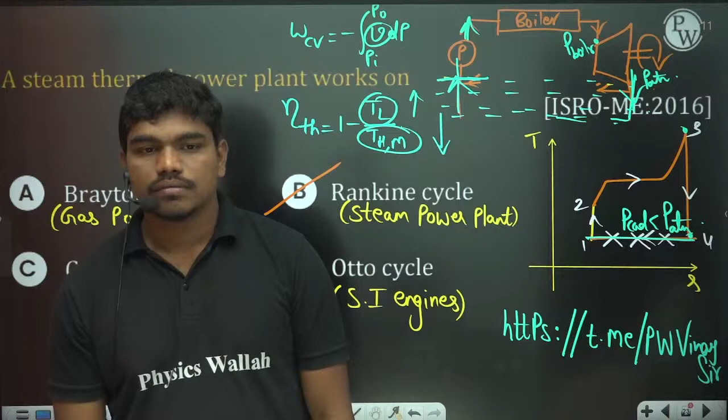They'll ask you sometimes, since the condenser is doing nothing except exchanging heat, can I maintain a plant like this? You can, but your efficiency of the cycle will fall. So how much pressure can we decrease in the condenser? Practically, condensers operate at 45 or 50 kilopascals. At that pressure the saturation temperature, where heat rejection happens, will be very small compared to ambient conditions. Normally condenser operating conditions are around 40, 45, 50 kilopascals. And pump work is always very small.

So let us go for the next question quickly. A simple steam power cycle receives 1 lakh kilojoule per minute as heat transfer from hot combustion gases and rejects 66,000 kilojoule per minute as heat transfer to the environment. Did I keep an extra slide here? No, okay, I'll manage from here. Guys, we will solve this question in a good way. Suppose you have a power cycle, a steam power cycle, basically some Rankine cycle.

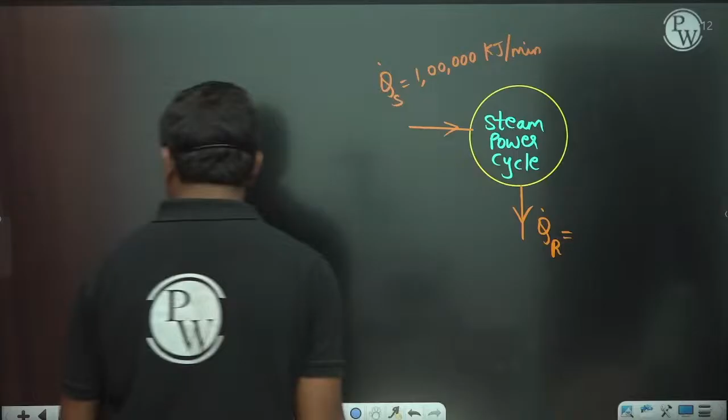Now if this is a steam power cycle, how much heat is it getting? Q dot S is equal to 1 lakh kilojoule per minute. And how much heat is this guy ejecting? Q dot R is actually equal to 66,000 kilojoule per minute.

Good enough, then what are they asking? If the pump work required is 1400 kilojoule per minute, okay, so pump work they have given, that's 1400 kilojoule per minute. Then what is the situation? The thermal efficiency of the cycle and the turbine power output generated.

So basically if this is a steam power cycle, there is a pump, and then from the pump it is going to a boiler.

Guys, I'll tell you one thing. Whenever I draw a boiler like this, I feel very funny, because in industries, whenever you get a boiler leak, if steam is blowing out, that is a very serious problem. Boiler is not very simple like a box, boilers in general are very big, and they create a lot of defects. Some leaks will be there. So whenever there is a leak, normally you keep a patch and weld, and then do radiography tests and all, normally for any leaks.

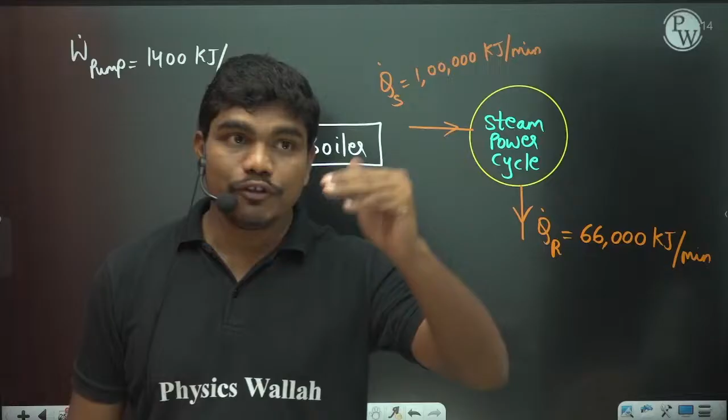So why can't we go beyond it? Because work done increases by decreasing pressure below 40 kilopascals, but there is something called vapor pressure for every fluid, and you should always have the state of matter as liquid in the condenser. If you decrease the pressure below 40 kilopascals, practically, because of some heat transfer from the surroundings, let us suppose the temperature is 10 or 20 degrees Celsius, then because of that heat flow there happens some cavitation problem, which you might have studied in fluid mechanics. When the pressure of any substance falls below the vapor pressure, bubbles start getting formed inside the system, and these bubbles will cause a cavitation problem that will block the device completely. So that's why we cannot go beyond certain limits, there is a limit. Theoretically you can go up to 10 kilopascals also, but practically there are certain restrictions because of the vapor pressure of the fluid.

So if you see this boiler, then there's a turbine generating some work output, and there is also a condenser. So these guys are connected in this fashion. So heat is added in this case, heat is rejected in this case, and work is given to the pump, and this guy gives us work output, W dot of the turbine.

Now they are asking for cycle efficiency and also the turbine work output. How do you calculate this cycle efficiency? Thermal efficiency of the cycle is equal to sigma W by Q dot S. But here turbine work is not known, so how will you calculate sigma W? From the first law of thermodynamics, sigma W is the same as sigma Q here, so this can be written as sigma Q divided by Qs, that is 1 minus heat ejected by heat supplied.

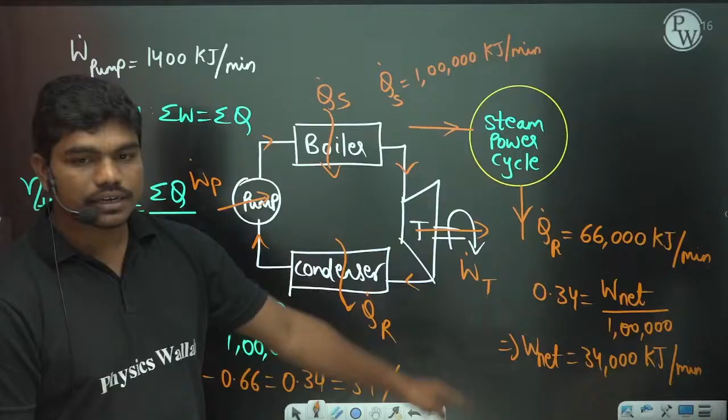Work generated by the turbine minus work consumed in the pump. Because even though the turbine is generating work, some part, though very little, is consumed by the pump. So W of the turbine equals W net, 34,000 kilojoules per minute, minus work consumed by the pump, which is 1400 kilojoules per minute. So 34,000 minus 1400 gives 32,600 kilojoules per minute. This is the amount of work produced by the turbine.

Now let us check, they are asking in watts. So if they ask in watts, divide by 1 minute equals 60 seconds, giving kilowatts. So the calculation is 32,600 divided by 60. Let us do this: the zeros get cancelled, 6 5s are 32, 6 5s are 30, so you have 26, 6 4s are 24, that gives 543.33. So 543.33 kilowatts is the turbine work generated in this case, from 3260 divided by 6.

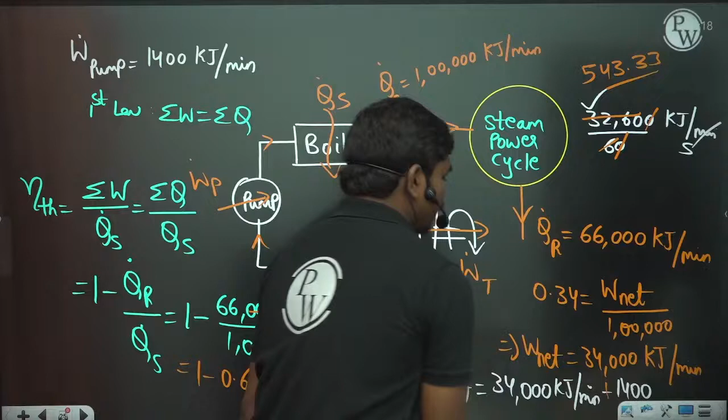This is 0.34, 34% efficient. So 0.34 equals W net by heat supplied of 1 lakh, so 34,000 is W net. So this is plus actually, sorry. Work developed by the turbine: W net equals work output by the turbine minus work consumed by the pump. So W turbine equals W net plus WP here. So if this is plus, then this quantity is 35,400.

400 by 60 seconds, so this value is in kilowatts. Let us calculate this value. The 0 gets cancelled, 6 5s are 30, then 6 9s are 54. That's it, 590 kilowatts. So if you see 590 kilowatts here, definitely option B is the correct answer.

Did you understand this calculation? Very simple, we calculated the efficiency first, and once you calculate the efficiency, we calculated the total work generated by the turbine. W net is work generated by the turbine minus consumed by the pump, so work generated by the turbine is W net plus work sent to the pump. That's why adding W net to the pump work gives the total work generated by the turbine, but this value is in kilojoules per minute. So to convert that into kilowatts, you convert the minute into 60 seconds, dividing by 60, giving kilojoules per second, which is kilowatts. This calculation gives 590 kilowatts.

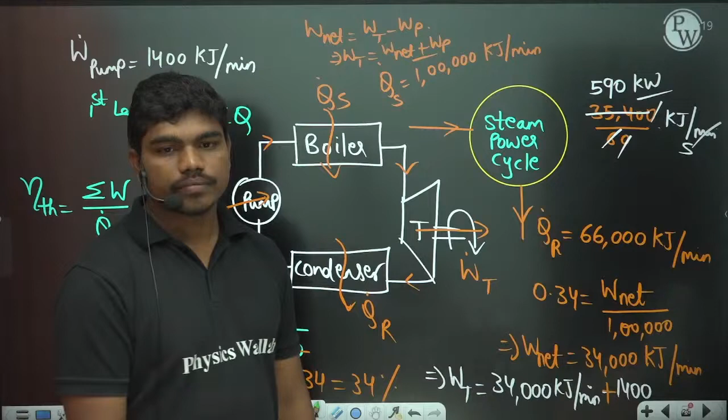Simple calculations, nothing using any calculator. Since in the exam too no calculator is allowed, I'm solving all questions without a calculator, but you can see a very clear idea of each example.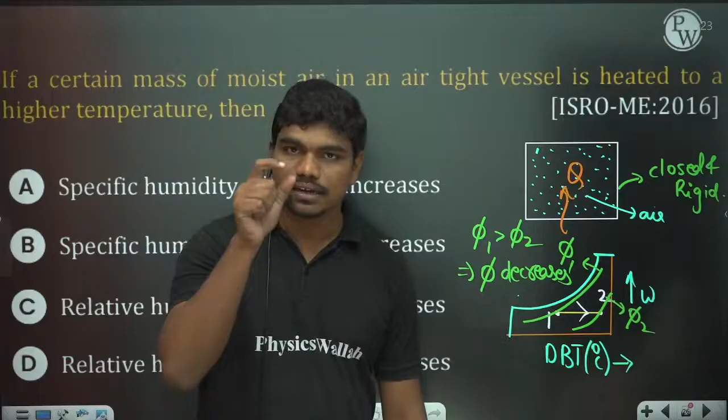So W is fixed and total mass of the air is also fixed. That's why this omega, which is basically the specific humidity, is locked. So specific humidity is fixed, there's no change in it. Now talking about relative humidity, since the point is going away from the saturated curve, the 100% saturated curve, that's why there is a decrease in phi. Relative humidity will decrease obviously. Also you can understand phi is equal to PV by P saturated at that particular temperature. So that's why when this temperature is increasing, phi will actually decrease.

So the correct answer is basically it decreases. Option D is the correct answer. Relative humidity will decrease. Clear to all of you?

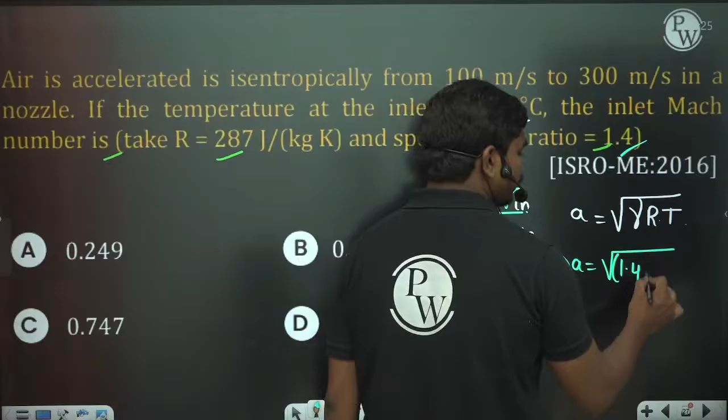Now let us see Mach number by acoustic velocity here. At the inlet of the nozzle, we want to calculate inlet velocity by acoustic velocity at the inlet conditions. Let us see what is the temperature at the inlet, 127. We know acoustic velocity is equal to square root of gamma R T. So if you simplify, A is equal to square root of 1.4, since gamma or ratio of specific heats is 1.4, times characteristic gas constant 287 joule per kg Kelvin, and inlet temperature. T inlet is 127 degrees Celsius, so plus 273 gives 400 Kelvin.

Now let us see what is the initial velocity. Velocity at the inlet is 100 meters per second. So if you want to calculate Mach number, let us see. Mach at inlet is equal to 100 meters per second divided by the square root of 1.4 into 287 into 400. Then you can cancel this couple of zeros with a 10 here, and also you can cancel this 4 and write a 5 here.

So square root of 5 divided by 1.4 times 287. So what could be this value? You can see 0.249, 0.442, 0.747, 0.333. You can understand one thing, there is one similarity between the options. That value is a bit difficult to calculate without a calculator, but try to understand there is some simplicity.

Oh, I think I have written this 5 under the square root. So 5 by square root of 1.4 into 287. Now you see, this value is something close to 0.25, this is below 0.5 but close to 0.5, this is slightly more than 0.75, this is 1 by 3 almost. Now if you see this value, 1.4 is almost close to 1.414, so this is like square root of 2 actually.

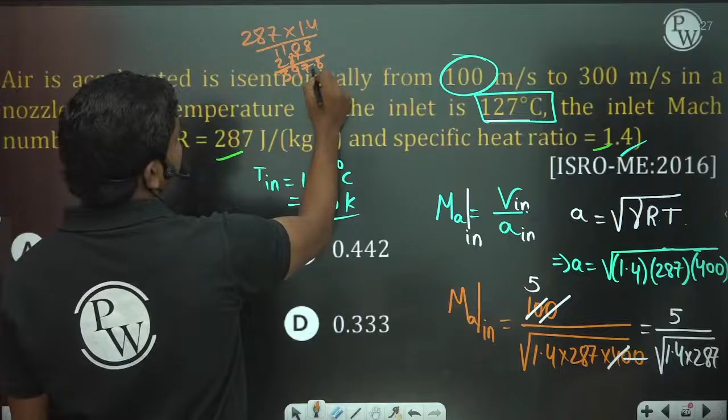And this 287. So if you do that calculation, 287 into 1.4, it comes to 401.8. So if this value is around 401.8, let us suppose it is very close to 400. If it is actually 400, the value would have been 0.25.

If this value is 400, then 5 by square root of 400 is 5 by 20, which is 1 by 4, so 0.25. So the answer should be very close to 0.25. Out of all these options, this is the option which is close to that. Performing that calculation could give you around 0.249. That is the most appropriate answer out of these 4 options. Did you understand the logic here without a calculator?

When you calculate this value, 401.8 is what you are getting here. So if this is 401.8, that value is very close to 400, so this value would have been 0.25. So we have to go for a value very close to 0.25, and the first option, 0.249, is there. So that's why we can tick that option. So 0.249 is the correct answer in this case. Clear?

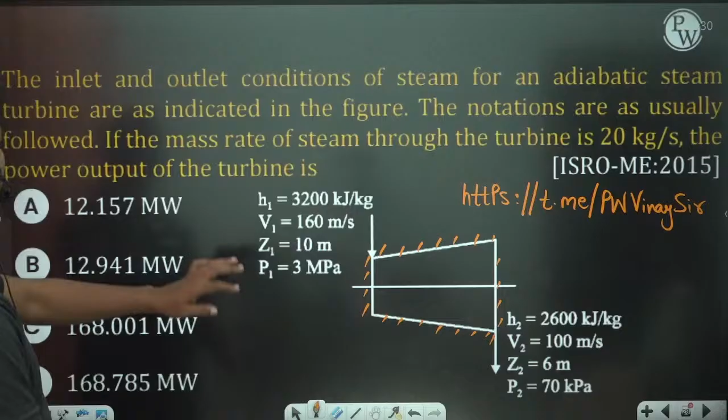Fine. So let us solve this question. The inlet and outlet conditions of steam for an adiabatic steam turbine are as indicated in the figure. The notations are as usually followed. If the mass flow rate of the steam is 20 kg per second, the power output of the turbine is dash. So they want to calculate the power output of the turbine. They have given you 168.001 megawatts, 168.785 megawatts. I think these are very close. Okay, now let us see.

If we apply the steady flow energy equation, Q dot minus W dot of the control volume is equal to m dot times delta KE plus delta PE plus delta h. I think enthalpy values are given, h1, h2 given. Fantastic. So let us see. This is an adiabatic turbine.

So this gives you work interaction of the control volume. If you neglect this minus sign, m dot into 1 by 2000, because everything will be in kilowatts, V inlet square minus V outlet square. Normally it is final minus initial, but because of this minus sign I am writing it inverse, plus g by 1000 times of Z in minus Z out plus H in minus H out. You can write this H in minus H out in kilojoule per kg now, because we have written everything in terms of SI units.

So mass flow is 20 kg/s, 20 times of 1 by 2000 into velocity in square minus velocity out square. Velocity in is 160, velocity out is 100. So 160 square minus 100 square can be written as 60 into 260, because a square minus b square can be written as a plus b into a minus b. 160 minus 100 is 60, 160 plus 100 is 260. So this is 260 plus g.

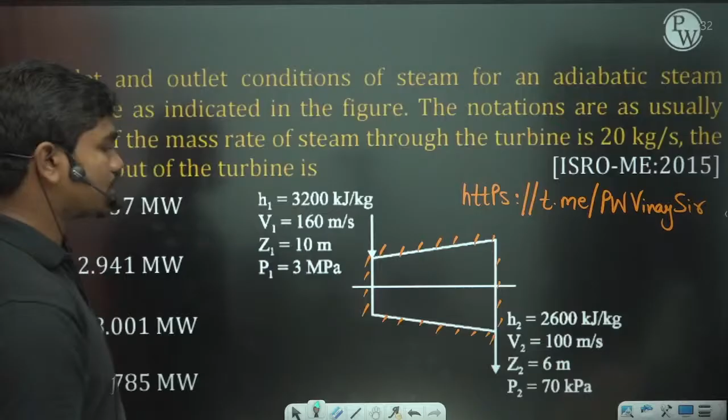So what is the value of g? Nothing is given, so let us take 9.81. 9.81 by 1000 times of Z inlet minus Z outlet. Z in is 10, Z out is 6, so this is 4, plus H inlet minus H outlet. H in is 3200, H out is 2600, so total 600 kilojoule is the difference.

Now if you see this calculation clearly, these couple of zeros get cancelled. So if you multiply 20 into 6 into 26 by 20, 20 gets cancelled, 26 times of 6. And this 20 cancels out this 1000 50 times. And 4 cancels out this 12.5 times. 9.81 by 12.5 plus 600 into 20, 12,000. So there is 12,000 kilowatts here.

If you convert that to megawatts, this will be around 12 megawatts, because these terms will be very small. So definitely these two are wrong options, but within this 12 you can see there is certain variation. Let us compute these values. 26 into 6, this gives you 156, so 0.156. So 12.156.

Plus this value 9.81 by 12.5, which is much smaller, and this is in kilowatts, so this value will be less than 1 kilowatt. If you convert that, that will be a very small megawatt value. 157 maybe due to this decimal. Look, this is in kilowatts, but this value is less than 1 kilowatt. So if you convert this to megawatts, it will be like 0.001 megawatt.

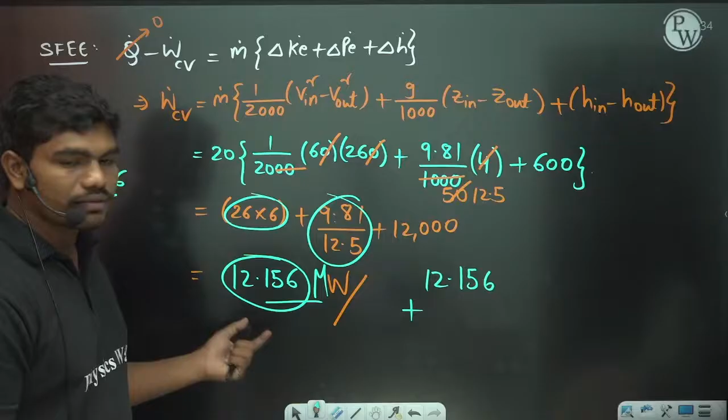So that's why 12.156 megawatts is the actual value of the work generated by the turbine in this case. Clear? Is this clear to all of you? 12.156 megawatts, that's what you can keep. 12.156 is very close to option A, so you can tick that. That's the correct answer. Fine.

So I think these are the questions. We still have some questions to do, but I think the time is up. Let us see if there are some complicated questions you cannot do. These are the kinds of questions where stagnation properties are very important, so I have kept these points.

They're asking you the Mach number of the flow. You know Ts minus T1 is equal to V square by 2 Cp. Mach number is equal to V by a. If you square this, V square by a square, so V square can be written as a square times Mach square. So Ts minus T1 is equal to acoustic velocity square into Mach square by 2 Cp.

They have given you the temperatures, and also gamma value is given. So what will you do with gamma? 360 is the stagnation temperature, and 200 is the normal temperature. So the difference 160 is equal to gamma R T1 into Mach square, we don't know the Mach number, divided by 2 Cp. Cp can be written as gamma R by gamma minus 1.

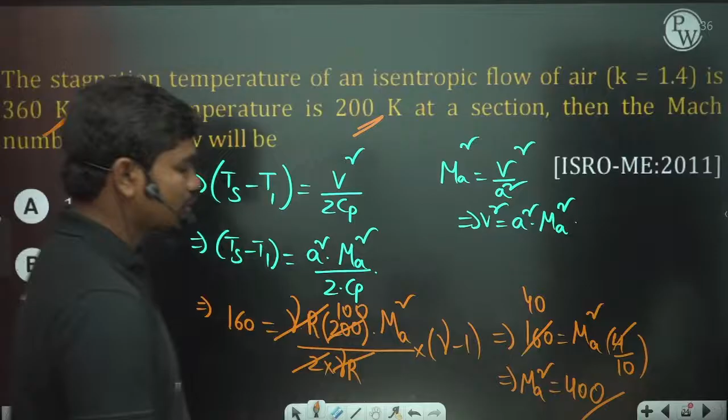So this gamma R and gamma R cancels, this is 100 times, so 160 by 100, this 100 is also there. Okay, so this 100 is also there, so that means this is 4. That's it, because this is going to be 1.60, so this is 0.4. Okay, so if you simplify, Mach square is equal to 4, so Mach is equal to 2. That's it. Okay, 2 is the Mach value, because this 100 is also there.

Okay, so this 100 divided with 160 gives you 1.6. So 4, 1.6 if you divide, you will get 0.4. So 0.4 into 10 gives you 4. So Mach square is equal to 4. So Mach number is 2 actually.

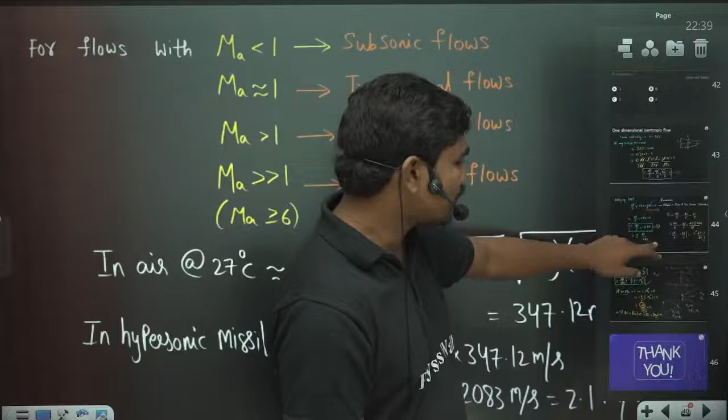Some normal questions you can solve using your fluid, some simple applications of thermodynamics knowledge, and also this hydraulic testing of boilers. As we told, normally this is called HT in industrial terms. Any device, if you want to do hydro testing, HT is called hydro test. So when you do HT, whatever is the operating pressure of that particular device, it can be boiler, turbine, whatever, you test the device at around 1.5 to 2 times of that pressure.

Okay, so this is generally the correct answer, at 1.5 to 2 times the working pressure. Working pressure is basically whatever pressure is dealt with by the device when that equipment is in working condition. Whenever there is some leak or something at any device, you maintain that device, meaning you do the necessary modification in the device, and you also test it before going for operation.

During hydro testing, you fill the device with water at a pressure around 1.5 to 2 times. Normally 1.8 is the ratio we maintain, 1.9 sometimes. We fill the water at that pressure and hold the device for some time. So the hydro test is generally done at around 1.5 to 2 times the working pressure.

Was the Titanic also tested, sir? Titanic was tested; that was blasted previously. Maybe there could be some design faults somewhere. But that's destiny, guys. If there is a destiny for you to die there, you will buy a ticket for 2 crore rupees, go under the sea at the time of your death, and die.

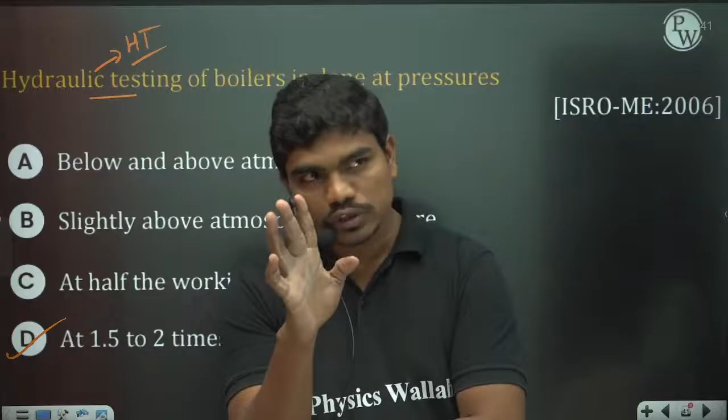That's called destiny. But at the same time, a lot of hard work is needed, a lot of effort, so please put in your efforts. Preparation is a process. Take every opportunity you get very seriously. Don't think, my age is 23 or 24, so if I leave ISRO now, there'll be recruitment again after 2 years and I'll get posted.

Don't think like this. Before this recruitment, ISRO announced around 165 mechanical vacancies in 2019, and the exam was conducted in January 2020, when the age limit was 35. People who missed it, at a time when there was no COVID in India yet, expected the next recruitment around 2021 or 2022. But for 4 years, from 2019 to June 2023,

there has been no bulk recruitment by ISRO, and they have decreased the age limit from 35 to 28. So a person who was 25 then, thinking he would get an opportunity in 1-2 years, is not eligible for the exam now. So use every opportunity.